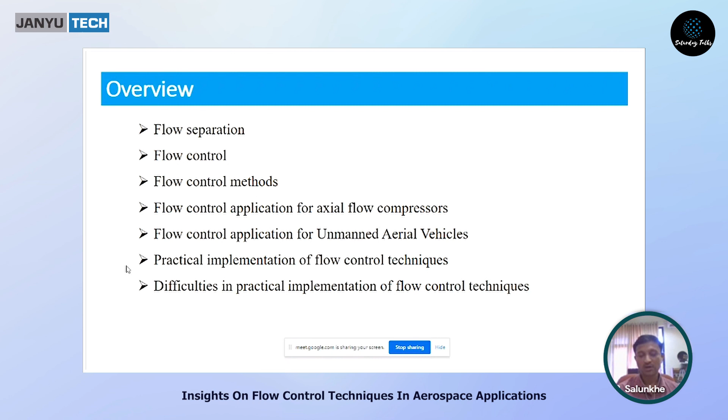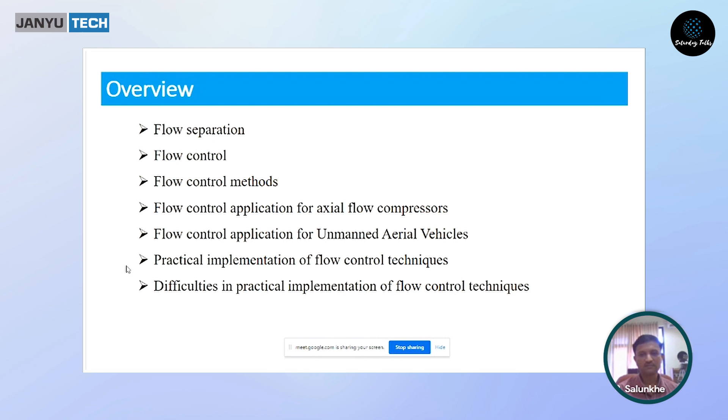Axial flow compressors were the focus of my research during my PhD days, and I am currently continuing that research. The other application, unmanned aerial vehicles, I worked on during a postdoctoral fellowship at Nanyang Technological University, Singapore, from 2012 to 2014. I will cover that as well. At the end, we will see the practical implementation of flow control techniques and the difficulties in their industrial adoption.

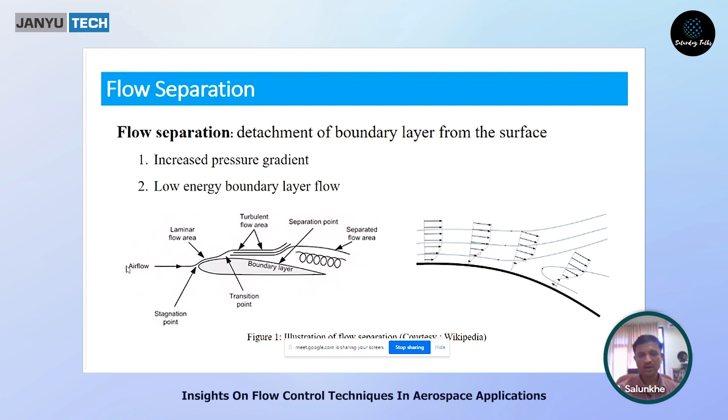First, we'll look at flow separation. Flow separation is the separation of the boundary layer flow from the surface. This happens when there is an adverse pressure gradient, meaning the flow experiences increasing pressure as it moves, such as with an aerofoil set at a higher angle of attack. In that case, the flow near the trailing edge of the aerofoil experiences a positive pressure gradient, which we call the adverse pressure gradient.

So in such a situation, what happens? The boundary layer flow already has lower momentum because the flow velocity varies from 0 to 99% within the boundary layer region. When it experiences this higher or positive pressure gradient, the boundary layer flow does not have enough momentum to move further.

At a particular point, the boundary layer flow comes to rest and then reverses its direction. It separates from the surface, and we say that the flow has separated. Another term for this is stall — the aerofoil or blade is said to have stalled. This is basically due to the adverse pressure gradient.

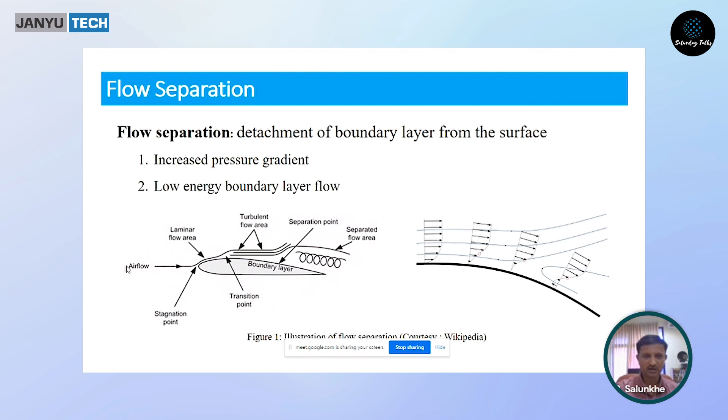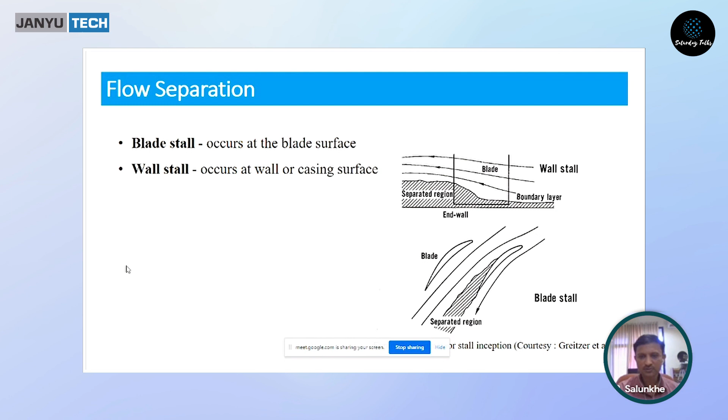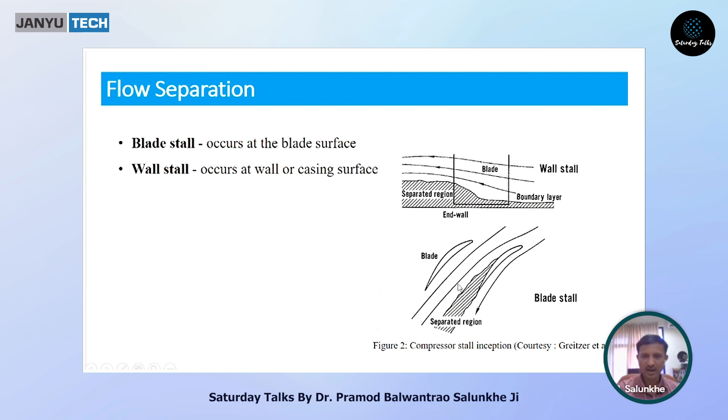Now, the flow may separate either from the blade surface or from the wall surface. Here in the figure, we can see the flow separation. The top figure shows the flow separation from the wall, and the bottom figure shows the flow separation from the blade. The hatched region shows the separated flow.

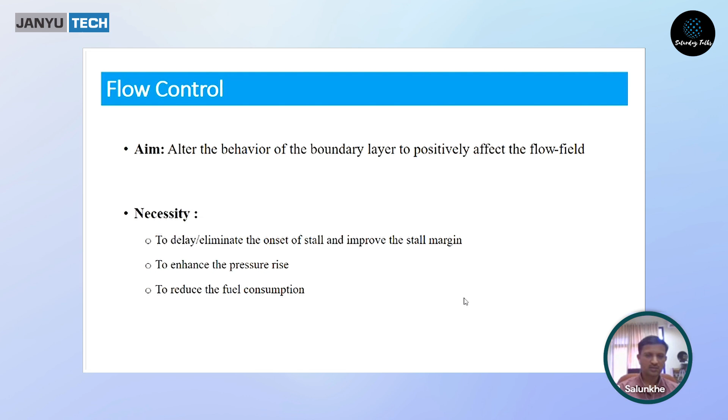Now, the flow separation is not at all desirable because it has various deteriorating effects. The first and major effect is it increases the drag significantly. Therefore, there must be some mechanism where we can control the separation of this flow.

So we will now see what is flow control. Flow control is not like we daily come across the control of the flow using a tap. But this flow control is the one where we modify the boundary layer flow and improve its performance so that the flow is not separated from either the wall or the blade surface.

And the necessity of the control of the flow is to delay or eliminate separation. Elimination in most cases may be difficult, but delay of the flow separation is obviously possible. So the delay or elimination of flow separation is to improve the stall margin, which is related to axial flow compressors.

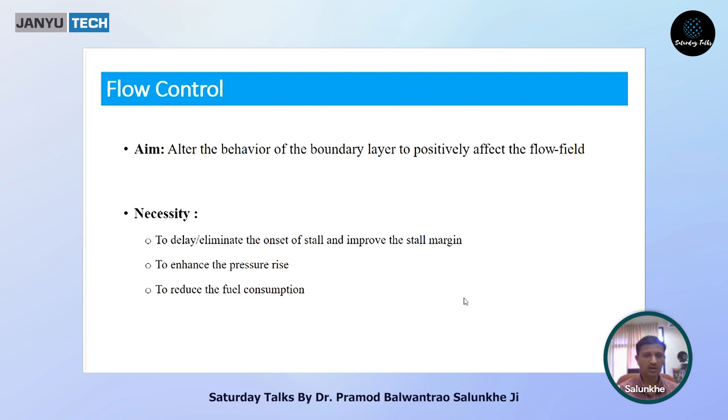The second necessity is to enhance the pressure rise across the compressor, because the function of the compressor is to increase the pressure ratio. The third is to reduce fuel consumption. Once we increase the stall margin and increase the pressure rise, the amount of fuel required automatically goes down. These are the important necessities in an axial flow compressor, which show the importance of flow control.

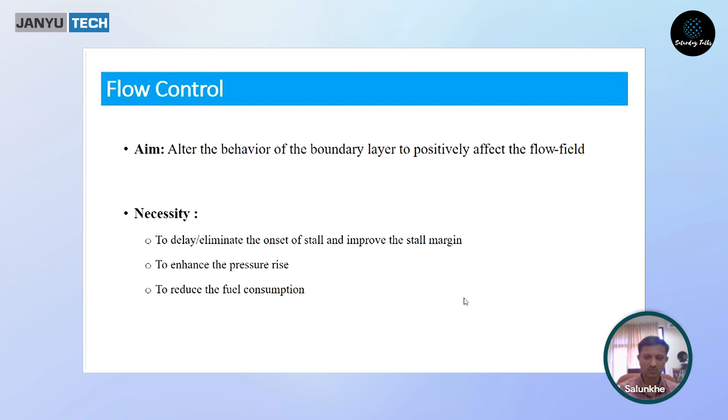There are two broad methods of flow control. One is passive flow control method and the second is active flow control method.

In passive flow control method, it is basically the geometric modifications of the casing, such as slots and grooves, that we'll see in the subsequent slides. The important advantage of passive flow control method is that we do not require any external energy, so there is zero energy requirement.

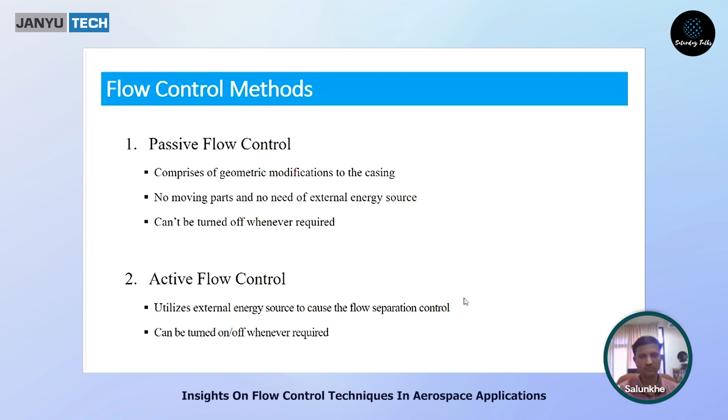But the disadvantage is, since we do not have any control, once we start the machine or start the engine, we do not have any control on the passive flow control device. So it cannot be turned off whenever we want. And when we install the passive flow control device, it adds frictional losses. So though there are some advantages, some disadvantages are also there, such as increase in turbulence and increase in losses, which brings down the compressor efficiency.

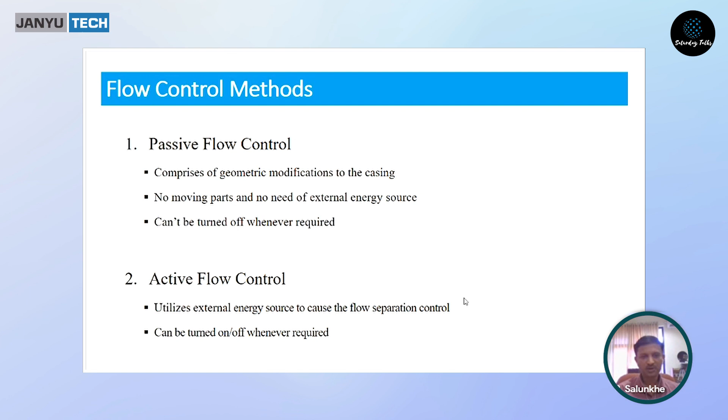The second method is active flow control method, wherein external energy is required to cause the control. The important advantage of the active flow control method is that, as per the requirement, it can be switched on or switched off.

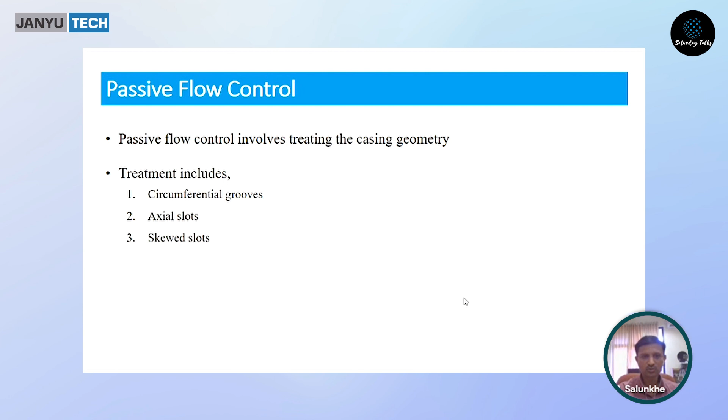Now we'll see different passive flow control methods pertaining to axial flow compressors. This includes circumferential grooves, axial slots, skewed slots, bent slots, and honeycomb casing. These are some of the different passive flow control methods.

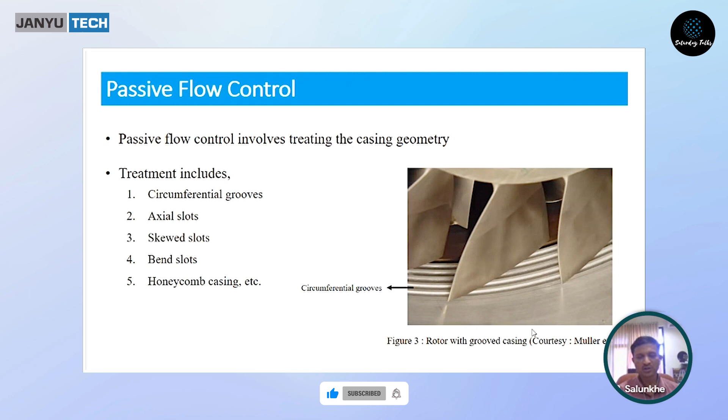In figure 3, you can see there are some grooves here. These grooves are made on the internal casing surface of the axial flow compressor casing. Whenever the flow passes through these grooves, it actually generates vortices. These vortices, when they come out of the groove, interact with the low energy flow and give their energy. Because of this momentum exchange, the flow separation is delayed or eliminated.

These are other configurations of passive flow control, such as honeycomb casing, circumferential groove, axial slots, and skewed axial slots that we can see. Different geometries can be made and the performance can be tested.

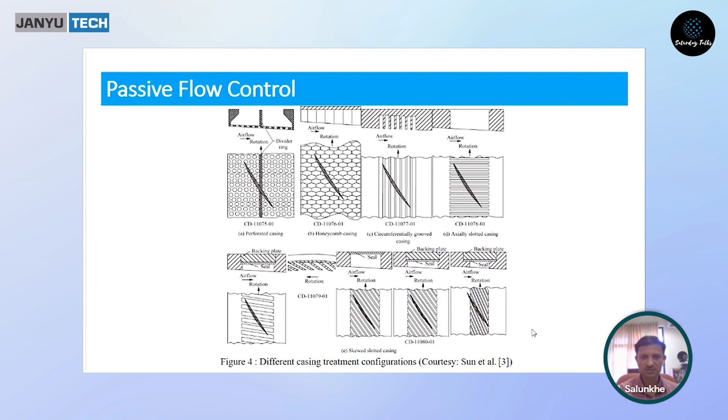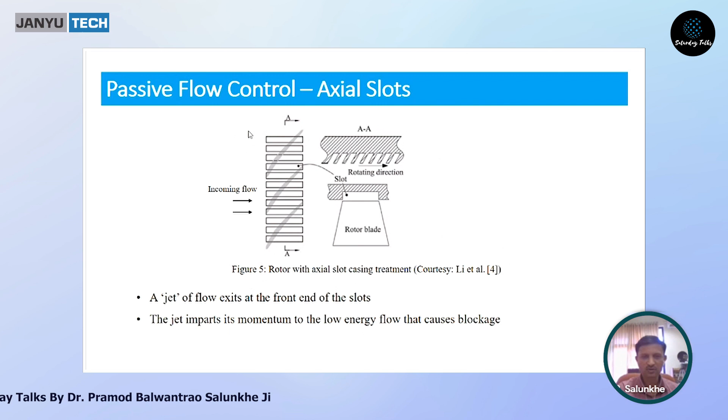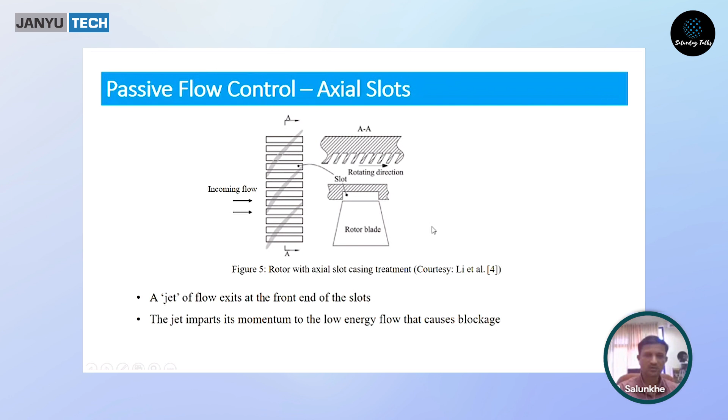The front view you can see here on the right side figure, wherein the cavity, rectangular shaped cavity, is seen. That cavity is intentionally provided so that the flow passes through the slot and it churns and creates turbulence. The skewed slots are observed to provide a higher stall margin as compared to the non-skewed slots.

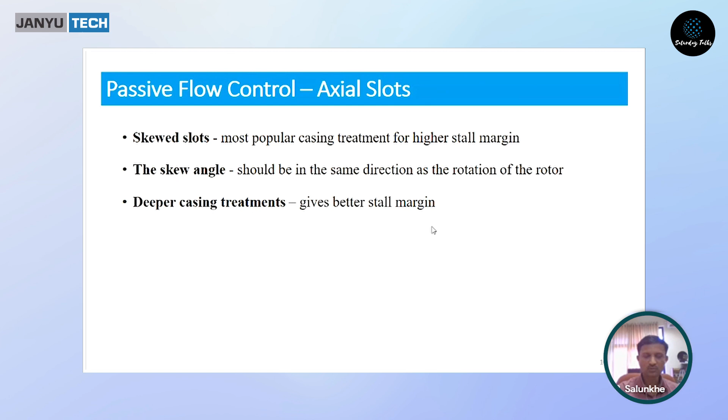It is also observed that if we increase the depth of the slot, depth being the thickness or height of the slot, then it gives more performance because it gives more churning within the slot. The momentum exchange from this flow which is passing out through such a slot gives higher performance.

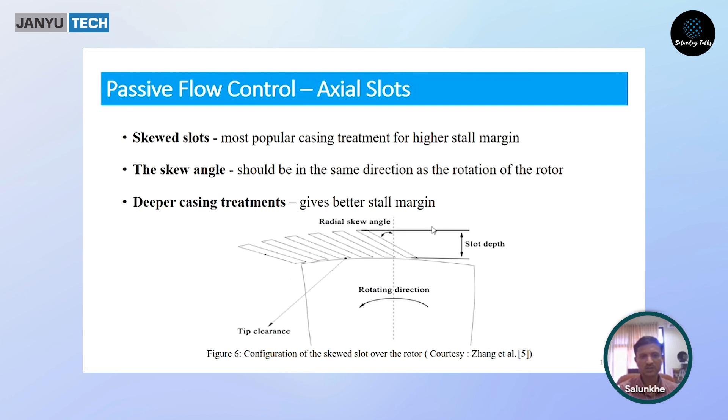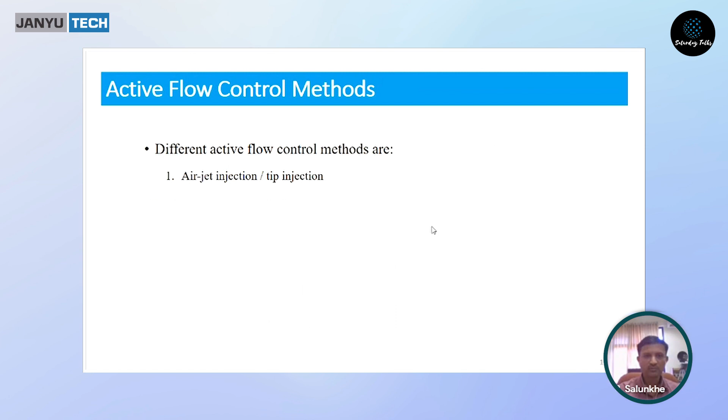Now we'll see the active flow control method. As I told you earlier, it requires external energy addition. So here we will see different techniques through which the active flow control method can be accomplished.

The first one, and the basic one, is the air jet injection, also called tip injection. In tip injection, we basically inject compressed air before the leading edge of the rotor. The tip section means where the span is around 100%. That tip section of the compressor rotor is very critical and is the region prone to flow separation, where the momentum of the flow is lesser, so stall inception occurs at the tip. If we supply high momentum air at the tip region, it significantly affects damping out the stall precursors or stall disturbances.

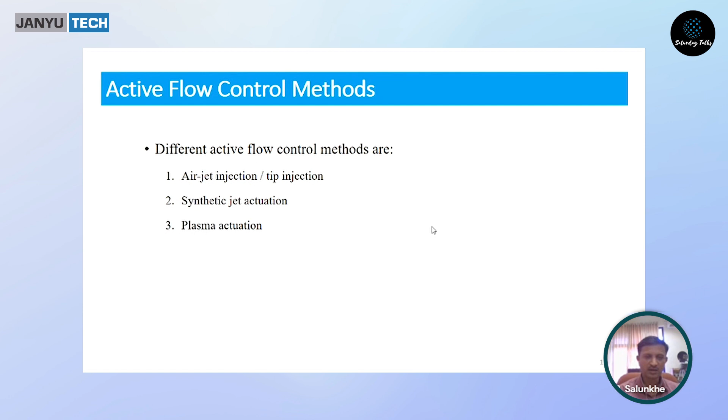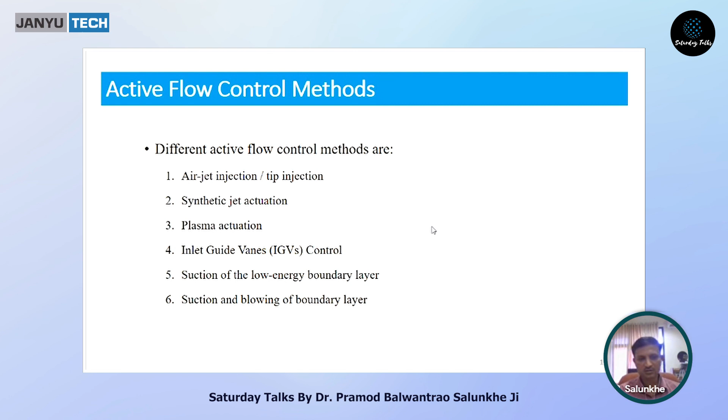So the first one is air jet injection, then synthetic jet actuation, then plasma actuation, inlet guide vane control, suction of the low energy boundary layer flow, and suction and blowing. These are the different methods. Out of these, the first three have a lot of current research going on, and the last three are not very popularly used.

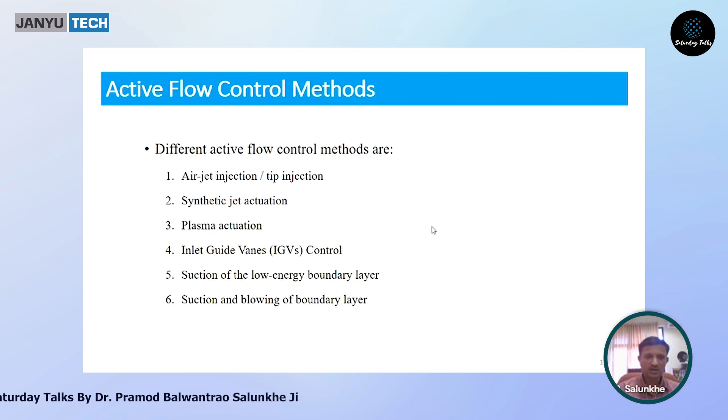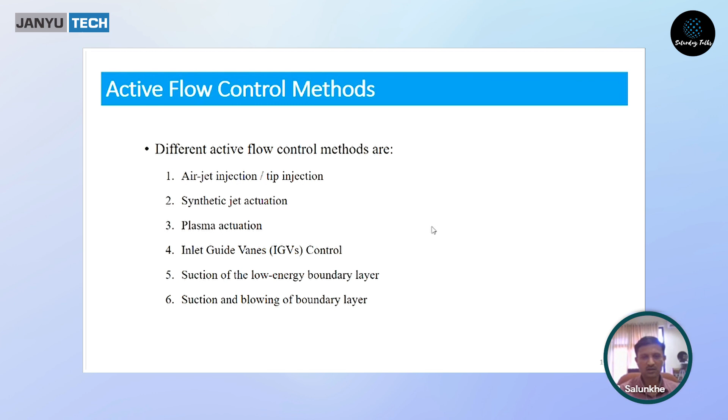In earlier days, inlet guide vane control was tested a lot, but nowadays it has stopped because the function of these inlet guide vanes is to control the flow passing through the axial flow compressor and increase the incidence angle as the flow enters. The reason it has stopped being used is because inlet guide vanes increase the weight and consume a lot of space of an axial flow compressor or the overall engine. So people are now not using inlet guide vanes or IGVs.

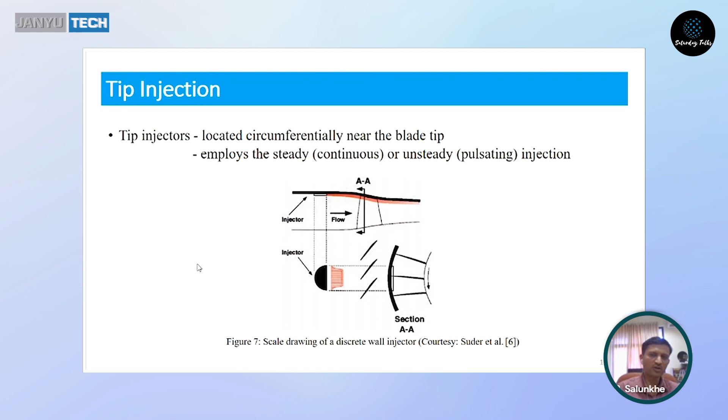If it is unsteady, we call it pulsed injection. It is also observed that if we give pulsing to the injection, it is more effective because it helps generate more vortices, and the energy exchange is significant as compared to continuous injection.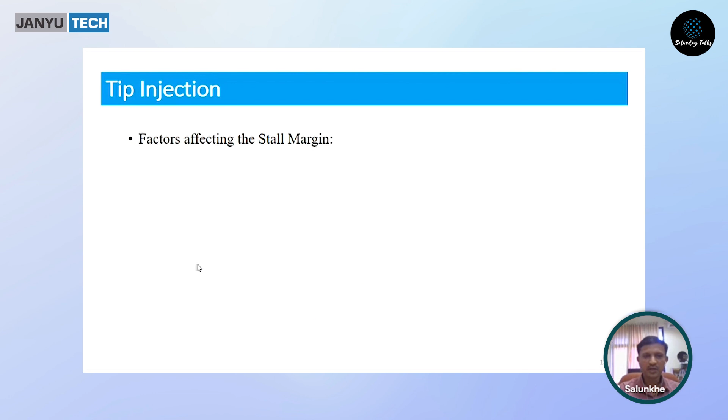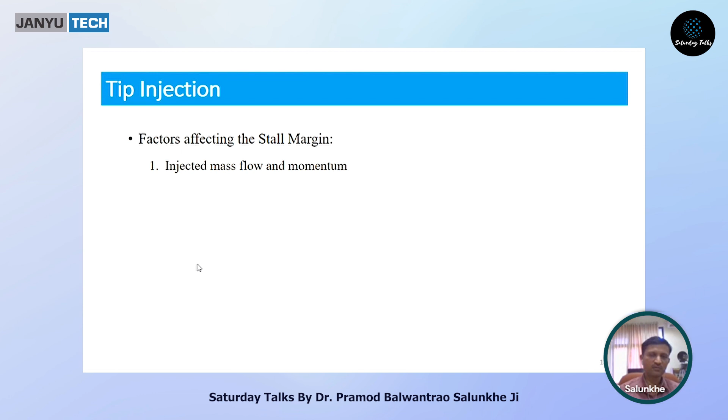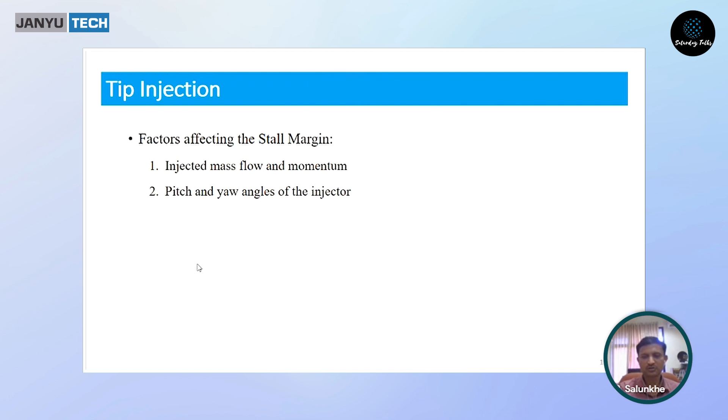In case of tip injection, the important factors that affect the stall margin of the axial flow compressor are: the injected mass flow and momentum - higher the mass flow, higher will be the momentum; the pitch and yaw angles of the injector, where pitch angle is with respect to the vertical direction and yaw angle is with respect to the sideways direction; and third, the axial location of the injectors.

If we keep the injector close to the leading edge, the usual distance is around 2 to 3 millimeters, then the momentum exchanged by the injected flow is significantly higher. But if we keep the injector quite away, such as 6 or 7 millimeters, the higher the distance between the blade and the injector, the momentum is lost by the time the jet reaches the blade leading edge. Therefore, it is always advised to keep the injectors close to the blade leading edge.

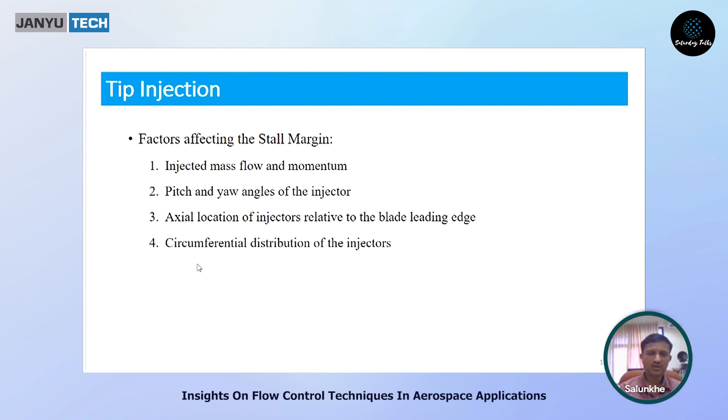Then circumferential distribution of injectors - they have to be placed circumferentially equally. If you use very few injectors, the area covered along the circumferential direction will be less, and therefore it may not significantly affect the highest possible compressor performance.

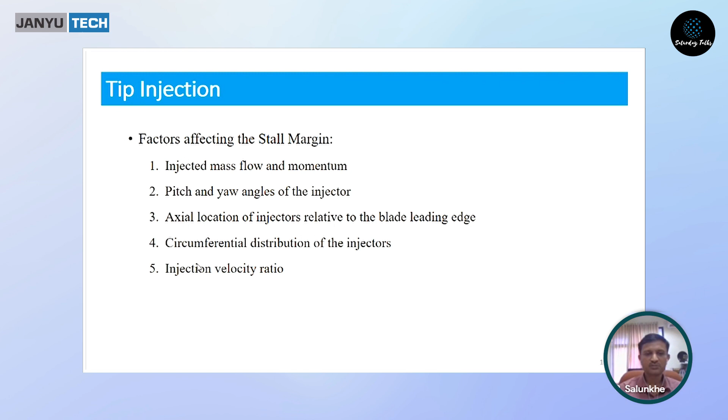And finally, the injection velocity ratio, which is the ratio of jet velocity divided by the compressor air velocity. It is recommended to use a velocity ratio of at least 2 - that means the jet velocity must be twice of whatever air velocity is entering at the compressor inlet. Only in that case can the injection help in controlling the flow separation.

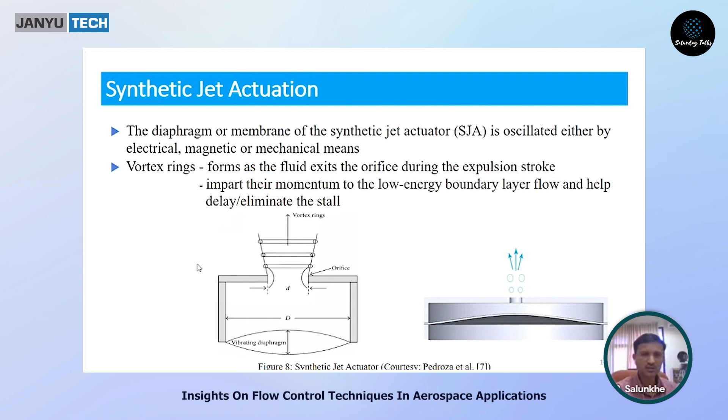The next technique is synthetic jet actuation, which is a recent technique used to control flow separation. The synthetic jet actuator basically comprises a piezoelectric diaphragm.

So as you can see here, the left side figure of figure 8, at the bottom side there is a piezoelectric diaphragm which may vibrate upward and downward, and there is an actuator geometry, and on the opposite side of the piezoelectric diaphragm there is an orifice. This actuator is fitted wherever we want to control the flow, such as inside the wing surface, and the orifice is exposed to the outside air.

As you can see, when the piezoelectric diaphragm moves down, as in the animation, the outside air flows into the cavity, and the upward stroke of this piezoelectric diaphragm expels this fluid through the orifice. So when the fluid is forced to eject through the orifice, it forms a train of vortices, and this train of vortices moves upward.

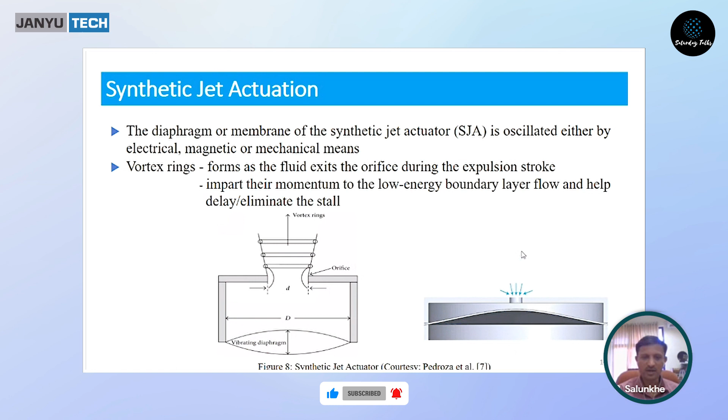When it moves upward, the outside flow interacts with this train of vortices and creates more vortices, and these vortex structures further interact with the boundary layer flow and exchange their momentum. So by this technique, the flow separation can be controlled or eliminated.

Now, as I mentioned, I will be covering here the two applications of flow control. One of them is axial flow compressors. I studied the axial flow compressors and did research during my PhD days, and currently one PhD student is pursuing his research on axial flow compressors. The second one is unmanned aerial vehicles, which I researched during my postdoc at NTU Singapore. So we'll see these one by one.

For that, they require electricity, and using that electricity, the mechanical energy is converted into fluid energy. So compressors, pumps, blowers, and fans are examples of power absorbing devices. And compressors are further classified as axial flow compressors, radial flow compressors, and mixed flow compressors.

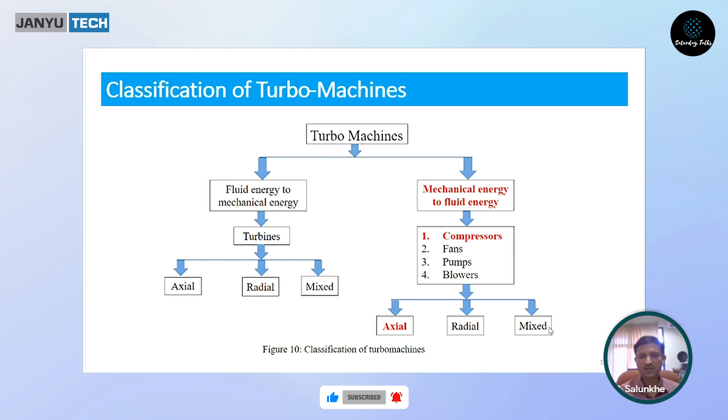In axial flow compressors, the entry and exit of the flow is axial. In radial flow compressors, the entry and exit of the flow is radial. Whereas in mixed flow compressors, the entry of the flow may be axial and exit is radial, or vice versa - entry is radial and exit is axial. Now in this presentation we will focus on the axial flow compressors.

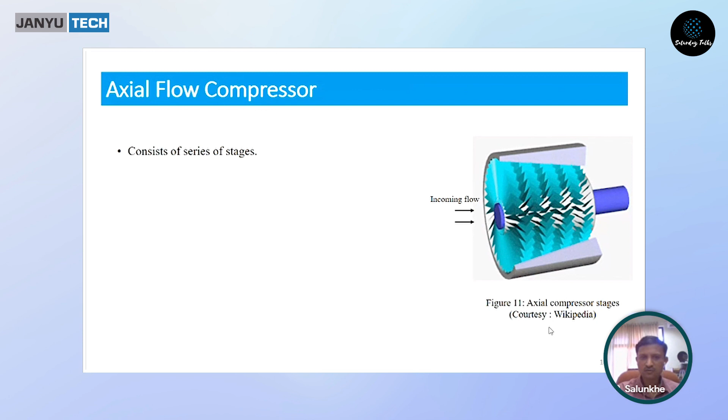The axial flow compressor along with different stages is shown in figure 11, and you can see the different components of axial flow compressors: one is the row of rotor, second is a row of stator, third is casing, and fourth is hub. Here in the animation you can see one row - there are 4 rows, and

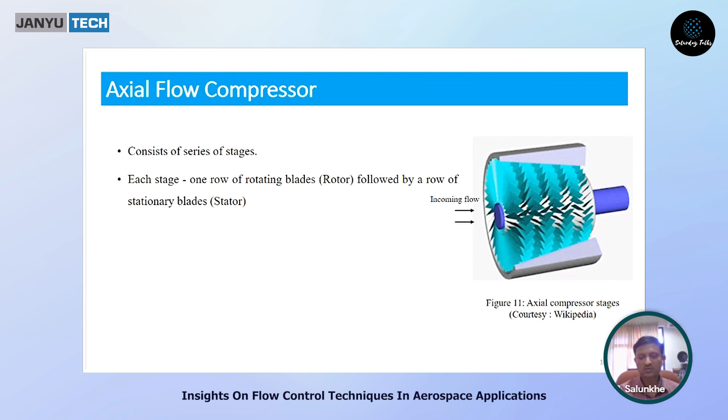these 4 rows are rotating about the axis. These are the rotors which rotate. They are fitted on the hub. Hub is the blue colored shaft on which the rotors and stators are fitted. Followed by the rotor, there is a stator. Stator is the stationary part. The function of stator is to guide the flow towards the next rotor row at a particular angle, and also to contribute to the pressure rise. In case of stator, the pressure rise happens because of conversion of energy. The kinetic energy is converted into pressure energy.

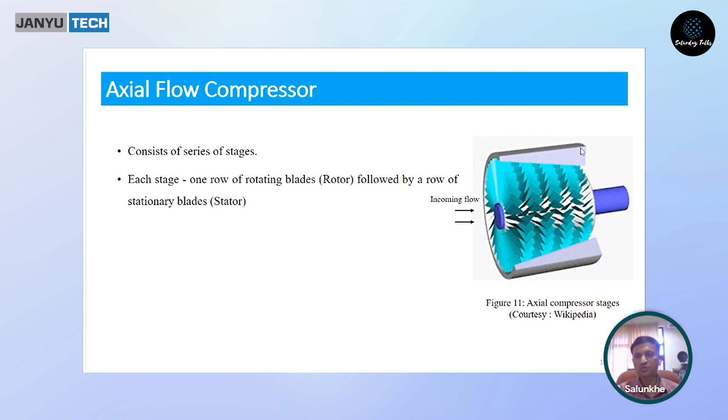Here, one row of rotor and one row of stator comprises one stage of compressor. So here there are 4 stages. So 4 rows of rotor and 4 rows of stator. So we can say this is a 4-stage compressor. Per stage, the pressure ratio in case of axial flow compressors varies from 1.1 to 1.4.

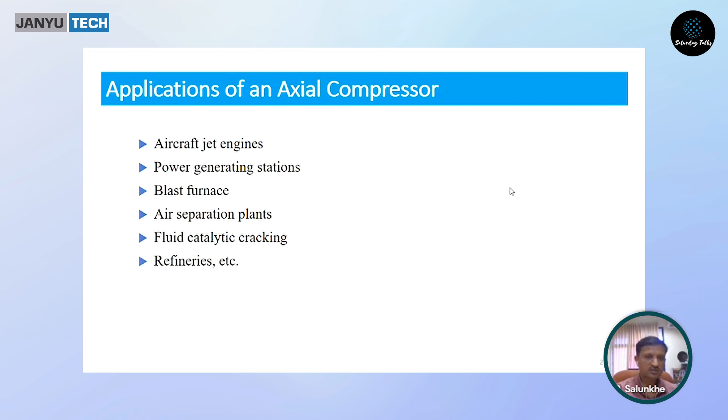There are different applications of axial flow compressors apart from aircraft engines. The other applications are power generating stations, blast furnaces, air separation plants, fluid catalytic cracking, refineries, etc.

Now, one question may come: why are axial flow compressors used in aircraft engines? Why not other types such as mixed flow or centrifugal compressors? The reason is axial flow compressors give the smallest drag force, and the second important reason is that multi-staging of axial flow compressors is very easy compared to centrifugal compressors. In centrifugal compressors, the frontal area is quite large and multi-staging is very difficult. So for aircraft application, they are not suitable.

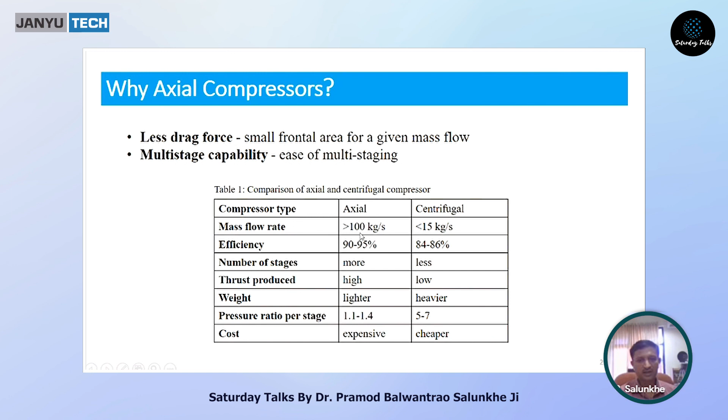If you see table 1, it gives a comparison between the performance of axial flow compressor versus centrifugal compressor. The mass flow that axial flow compressor deals with is significantly high, more than 100 kg per second, whereas for centrifugal compressor it is very less.

Axial flow compressors have higher efficiency. They can be multi-staged in more numbers, so the number of stages are more. It creates more thrust, and it is compact and lightweight compared to the centrifugal compressor.

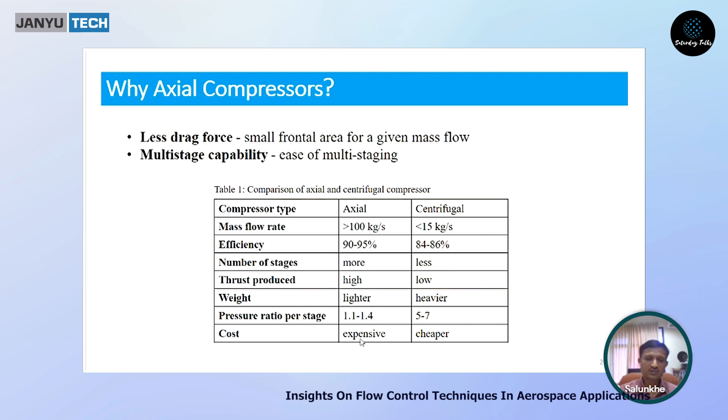There are 2 disadvantages. One is the pressure ratio per stage, but this is for a single stage. When we have multi-stage, the overall pressure ratio of axial compressor is significantly higher than centrifugal compressor, but if you use only one stage, the pressure ratio of centrifugal compressor is more. The design of axial flow compressor is very complicated and therefore it is expensive.

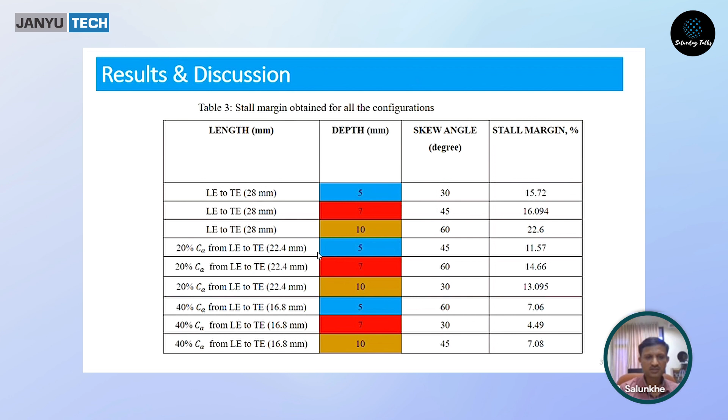Second parameter is the depth of the slot, 5, 7 and 10 millimeter, these are the 3 different depths we have studied. Third one is the skew angle, and we have used 3 different skew angles: 30, 45 and 60 degree.

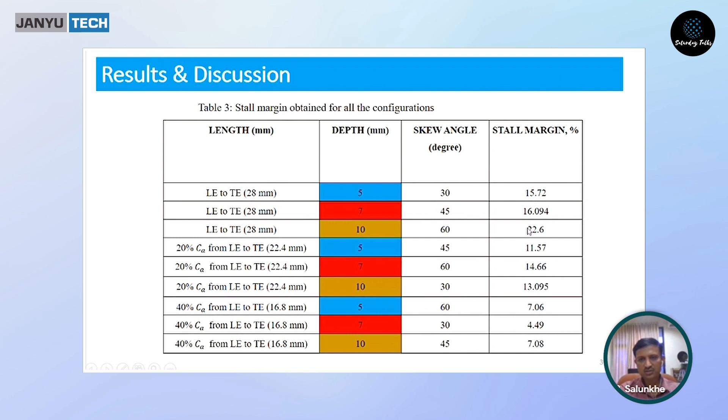We performed the simulations, and among these, the best performance is observed when there is a full slot length, that is from leading edge to trailing edge, with 10 millimeter depth and 60 degree skew angle. You can see the stall margin is 22.6%, which gave the best performance.

Here is one of the results, which shows the variation in axial flow velocity. The ordinate is from 0 to 1, it is actually the blade span, meaning blade height, and along this blade height, the variation in axial flow velocity is given. As I told you, the stall basically starts near the tip surface.

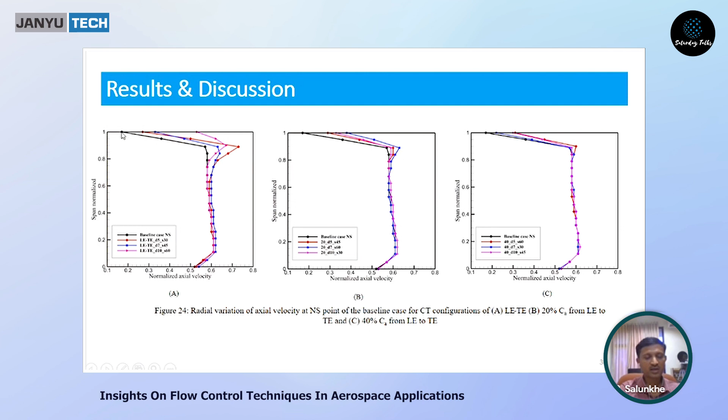So at the tip, that is at the top side, the axial velocity should be high. Unfortunately, in the baseline case, that is without any control, this velocity is low. As you can see here, the black line which shows the baseline case, meaning without any active or passive control, has small magnitude. The x-axis is normalized axial velocity, whereas when we implemented the passive flow control method, it increases significantly.

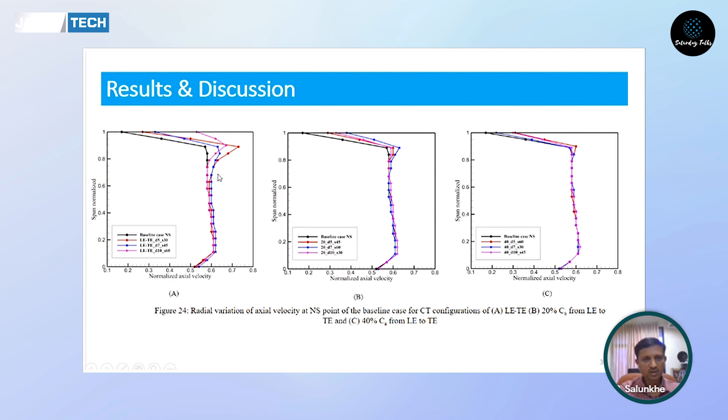As you can see here, the D10 S60, that is depth of 10 and skew angle of 60 with leading edge to trailing edge slot, it significantly increased the axial flow velocity.

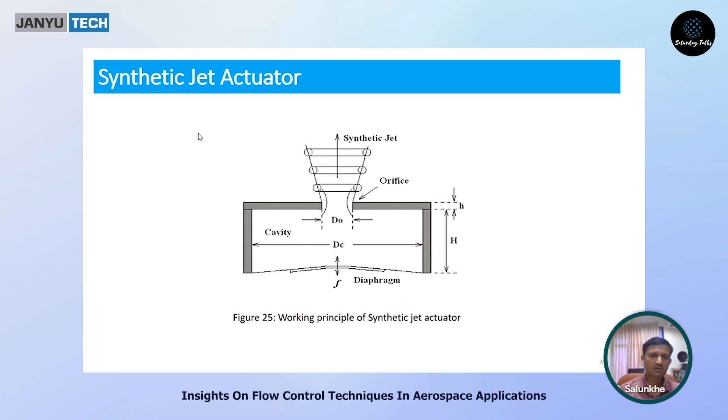Now we'll move to the unmanned aerial vehicle, which is the second application of the flow control. As I told you, and as you have seen during the animation, you are now aware of the working of the synthetic jet actuators. At the bottom side, there is a diaphragm which also oscillates, and during its expulsion stroke, it generates a train of vortex structures, which help to delay the onset of stall inception.

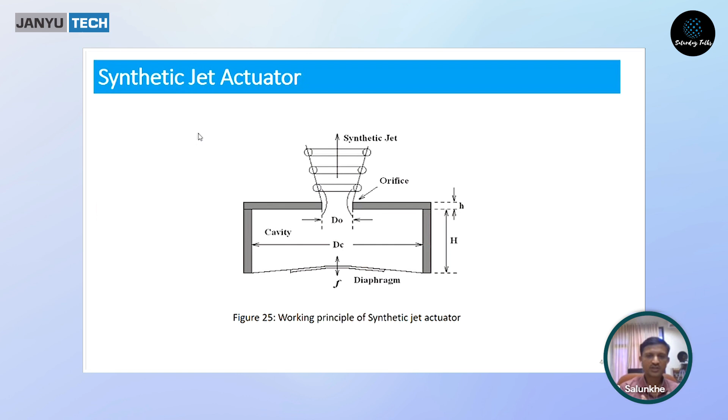This work was carried out at Nanyang Technological University, Singapore, and I used a particular novel kind of actuator. This actuator comprises of 4 piezoelectric diaphragms, attached on the 4 side walls of an actuator geometry, and on the top side an O-ring is fitted. There are 10 such actuators arranged in one array, as you can see in sub figure B.

These actuators in an array are housed inside the hollow part of the wing. I used 2 arrays: the first array was kept at 23% of the chord, and the second was kept at 43% of the chord. These actuators were open to the orifice.

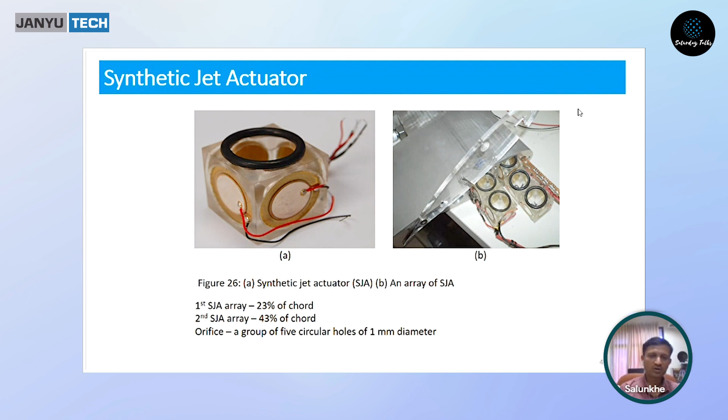On the top side of the aerofoil or wing model, we made the orifice of 5 different... one orifice consists of 5 holes, each of 1 millimeter diameter.

This flow was then illuminated with seeding particles. We had to seed the particles with olive oil droplets, and each droplet consisted of around 1 to 2 micron diameter.

And when these droplets pass through the laser light, these particles are illuminated, and this illuminated flow field is captured by the camera, 4 cameras. These 4 cameras were synced together so that it creates the images, and this was used to calculate the flow velocities that are passing over the wing model.

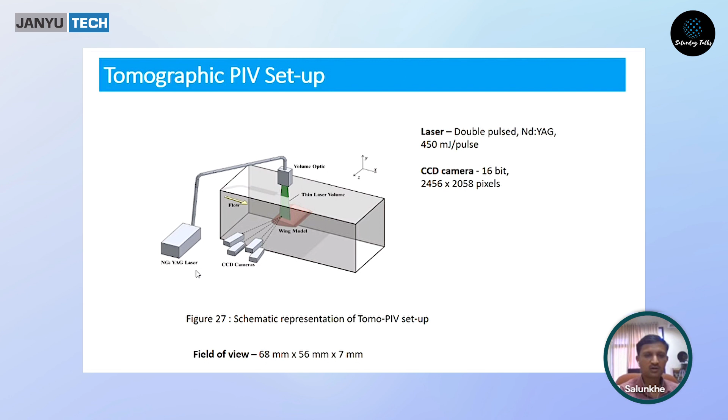Now we will come to the practical implementation of the flow control techniques. We have seen different kinds of actuators, active and passive flow control actuators, and I personally worked on some of these. The tip injectors I worked on during my PhD days, and passive flow control I am working on now. Synthetic jet actuators I have worked on for unmanned aerial vehicles, but to the best of my knowledge, at the practical level, these actuators are still at laboratory level.

So a lot of research is to be done. Further research is required on these actuators before their implementation. This actuator, a passive flow control device which has already been implemented on aircrafts, both civilian and military, is the vortex generator.

So when you go by a flight and get the window seat, when you see the wing, sometimes you may see some triangular fins fitted on the top surface of the wing. These are nothing but vortex generators. Their role is to prevent separation and induce vortex structures so that the flow will not be separated and will be energized.

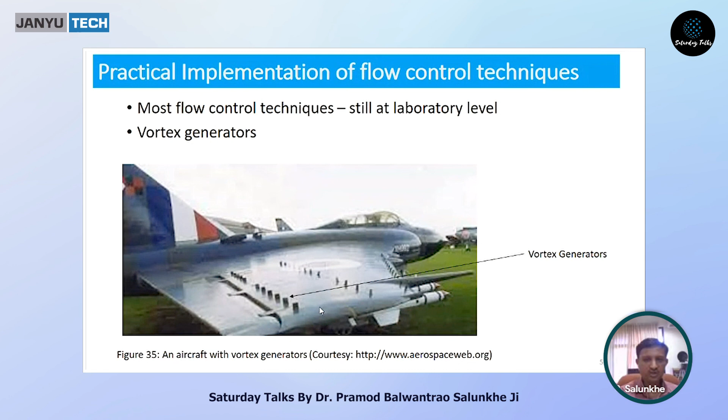So these vortex generators have already been implemented, but the other actuators will take some time before their implementation. The main difficulties in their implementation or adoption at the industry scale are feasibility, reliability, and effectiveness. Because when we implement something on the aircraft engines or wing, it should be 100% reliable, it should work 100%.

If you take the example of one particular method such as air jet injection, which is an active flow control method, if we want to implement air jet injection in a real case, there are some practical limitations because of which it has not yet been adopted by industry.

When I have to inject air in front of the rotor blade, I will need compressed air, so either I need a separate compressor, or I have to store the compressed air in a storage tank and then supply it. This will increase the space required, and already the engine is compact, so we have to make provision for the space, and not only the space, there are also associated accessories along with that.

If we plan to take the help of the compressor, whose function is to compress the air, we can also bleed air from the compressor and use that bled air for other applications such as stall inception control. But when we take the compressed air out, it will reduce the compressed air mass flow rate and also the pressure rise, and it hampers the compressor operation. So it's a trade-off.

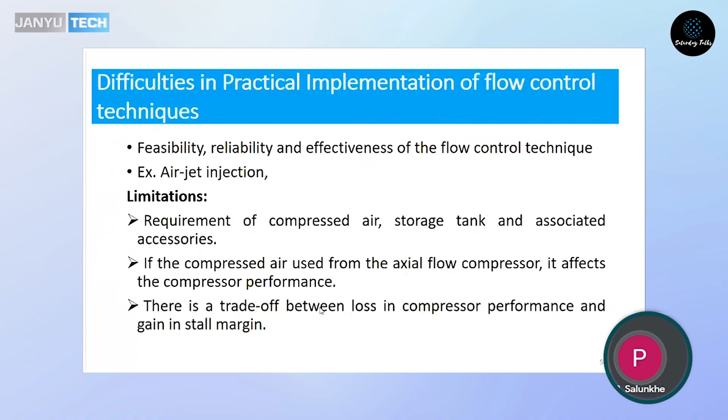Sir, I wanted to know, the vortex generators you showed, do they also suck the air back in? No, they do not suck any air. They just release stationary vortex structures. They are stationary devices, they do not require any power, we just have to install them.

So they continuously release the vortex structures? Yes, when the air interacts with these vortex generators, it creates vortex structures, and in the downstream of the wing, these vortex structures interact with the boundary layer flow and keep it energized. So they need to be kept continuously on when the airflow is on? Once you install them, we do not have any control, we cannot remove them.